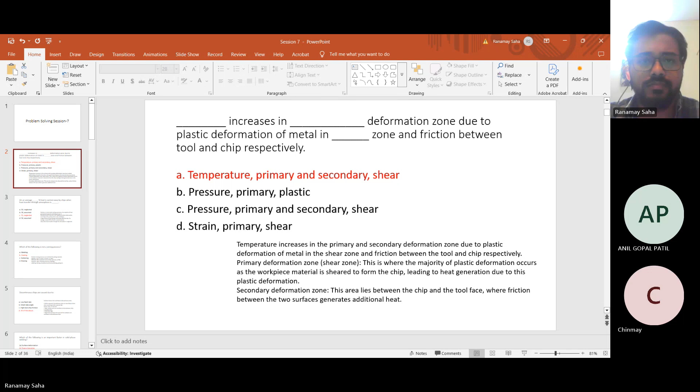The next question asks, on average, how much percentage of heat is carried away by chips when heat transfer to the atmosphere is neglected? As we discussed earlier, the maximum heat generation happens in the primary shear zone.

On average, 70% of heat is carried away by chips when heat transfer through the atmosphere is neglected, not assumed. In most metal cutting operations, the majority of heat generated during machining is absorbed by the chip due to significant plastic deformation in the primary shear zone, leading to a large portion of heat being carried away by the chip. So 70% of heat is carried away by chips when heat transfer to the atmosphere is neglected. I hope you answered this question well.

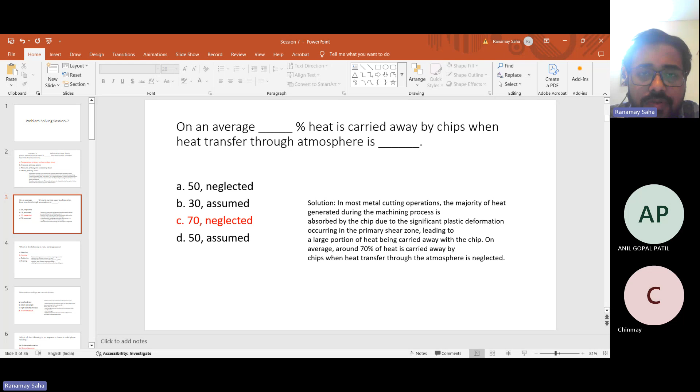The next question was simple: which is not a joining process? You can straight away know that except coating, all these processes are joining processes: welding, soldering, and brazing.

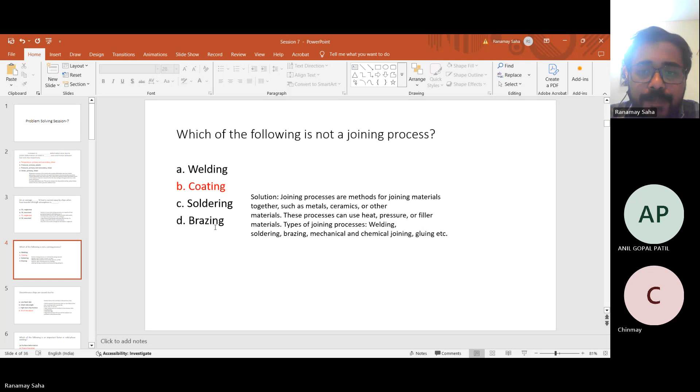The next question was about discontinuous chip formation. The factors that contribute to discontinuous chips include whether the material is brittle or ductile. Brittle materials, discontinuous chips are most likely to form when machining brittle materials such as bronze, brass, or cast iron. High cutting speed can lead to formation of discontinuous chips, and low feed rates can also lead to discontinuous chips.

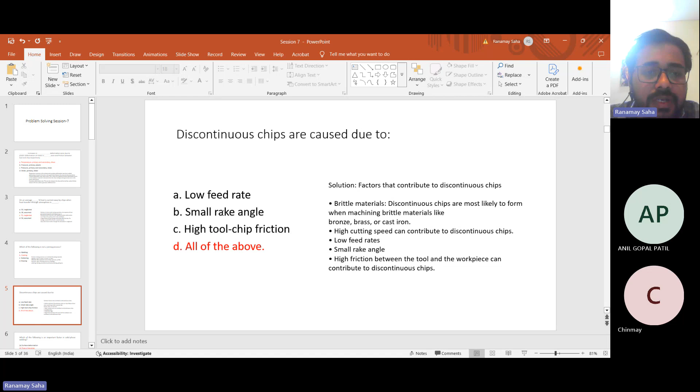A small rake angle means there is more friction between the tool and the workpiece, so in those cases also discontinuous chips can form. High friction between tool and workpiece is related to small rake angles. So in this option, all three options are correct, making option D the answer to the question.

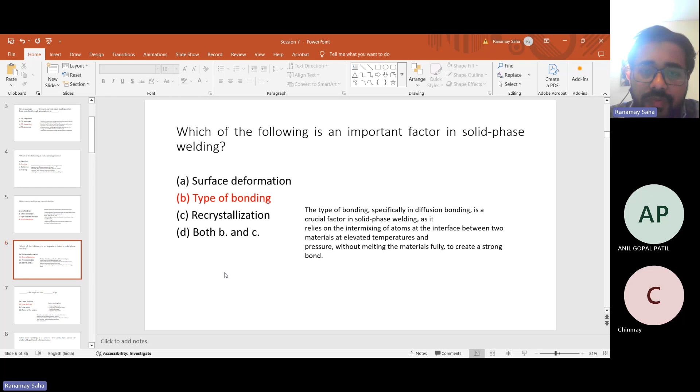The question asks which factor is important in solid phase welding. There are different factors to consider - some during machining, some during welding, and some pre-welding factors. The type of bonding, specifically in diffusion bonding, is crucial, as it relies on intermixing of atoms at the interface between two materials at elevated temperature and pressure without fully melting the materials, creating a strong bond. Since solid state welding doesn't reach the melting point, the bonding type needs to be considered well before the welding process is done.

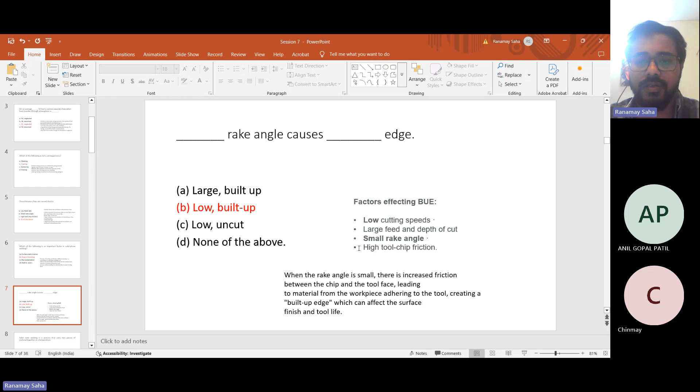The next question was about the relation between rake angle and built-up edge. Built-up edge formation is affected by low cutting speeds, large feed, and depth of cut, and is well affected by small rake angles. Small rake angles mean more contact between tool and workpiece, and more heat generation due to friction - equally meaning high tool-chip friction. So a low rake angle can actually cause built-up edge.

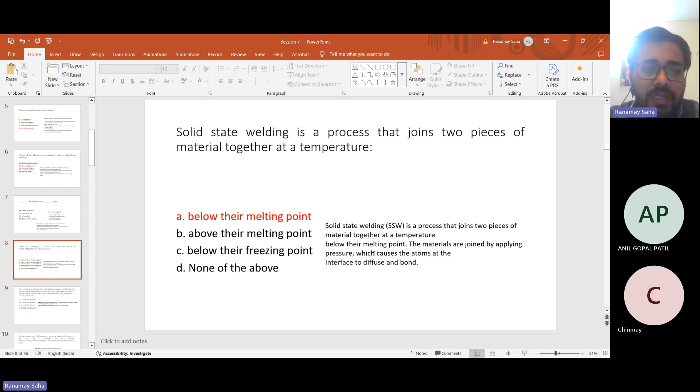The next question was about the solid-state welding process and the melting point. Solid-state welding joins two pieces of material together at a temperature below their melting point. Generally, we reach the recrystallization temperature, and at that point recrystallization happens with reformation of the grain structure, which defines the joint after welding. The materials are joined by applying pressure, which causes the atoms at the interface to diffuse and bond. So option A here is the correct option.

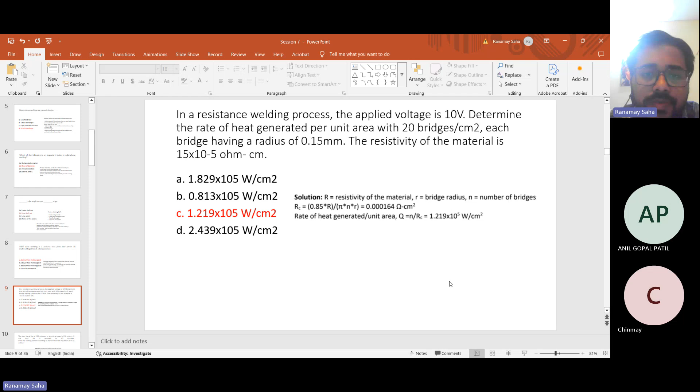The next question is a numerical - we've seen extensive numericals of this kind in earlier class. In a resistance welding process, the applied voltage is 10 volts. You have to determine the rate of heat generated per unit area with 20 bridges per centimeter squared, each bridge having a radius of 0.15 millimeters, and the resistivity given. Using R for resistivity, small r for bridge radius, and n for number of bridges, the heat generated per unit area is given by N divided by RC. RC can be determined using the relation between resistivity, bridge radius, and N: 0.85 R divided by pi r n. Plugging in values gives RC as 0.000164 ohm centimeter squared, and the rate of heat generated becomes 1.219 x 10^5 watts per centimeter squared. It's an easy formula-based question.

This was followed by a question on tool life, using Taylor's tool life equation. We've done much more extended equations based on tool life, so this type should have been easy. Here, tool life of 180 minutes is given at a cutting speed of 18 meters per minute, and the tool life is reduced to 45 minutes - find the new cutting speed according to Taylor's tool life equation, when exponent n is 0.5. You just equate the Taylor's tool life equation, Vt^n equals constant, in both situations: first with speed 18 meters per minute and time 180 minutes, second with new tool life 45 minutes, solving for speed with n=0.5. Plugging in the values, the velocity in the second case comes out to 72 meters per minute.

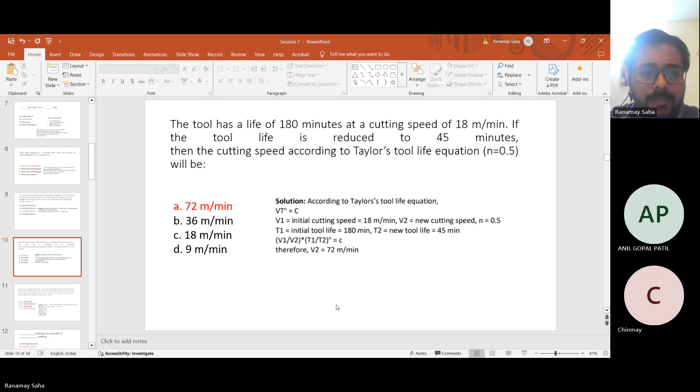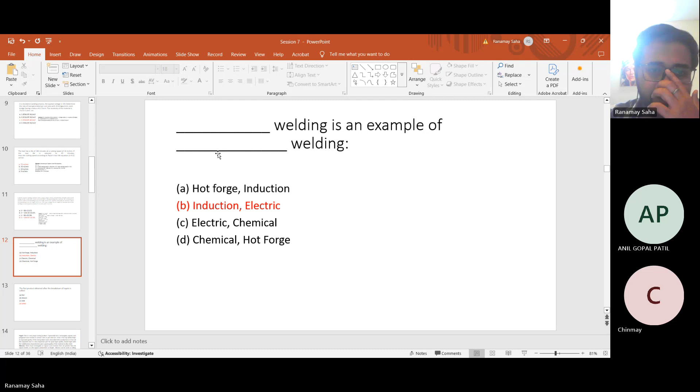What actually is an ingot? An ingot is a very large casting product, generally having a rectangular, square, or polygonal cross section in various sizes as per end use, meaning the desired application. It has a hot top which helps improve the quality of the end product and is discarded after production as it has all kinds of impurities. Despite this, it is a very important part for good ingot quality - sound ingots with good solidification characteristics give good quality material in alloy steel.

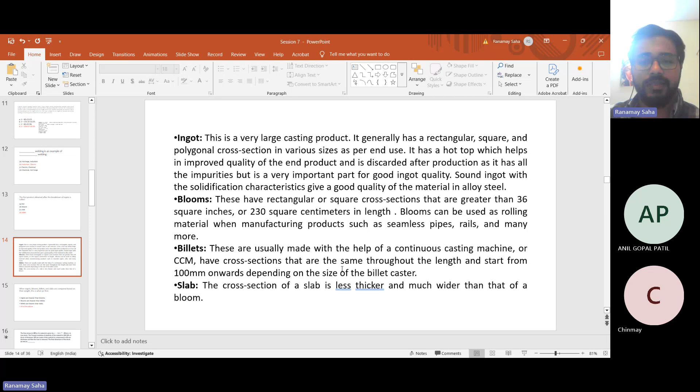Again, what are billets? Billets are those parts which are having uniform cross sections throughout the length, and these are made with the help of a continuous casting machine. So now I think you can relate the answer to this question: the first product obtained after breakdown of ingots is called billet, right?

So one more question on this discussion is: when ingots, blooms, billets, and slabs are compared based on their weight, what do you find? If you look at the first question, we have ingots are heavier than blooms, and blooms are heavier than billets.

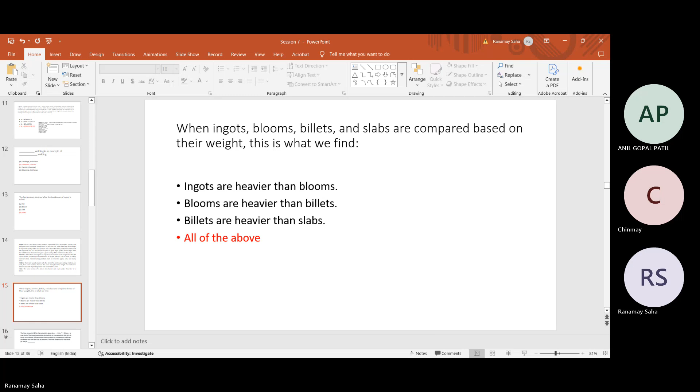Just a second. Yeah, so ingots are heavier than blooms.

Of course, ingots are the first, largest casting product, so these are heavier than blooms. Blooms are derived from ingots, so blooms are the next heavier part, and then billets are again derived from blooms. So blooms are heavier than billets, and billets are heavier than slabs, because in slabs the thickness is almost half of that of its width.

So all three options are correct. We have 'all of the above' as the answer to this question. I hope that's clear to you. If you have any doubt, you can please ask.

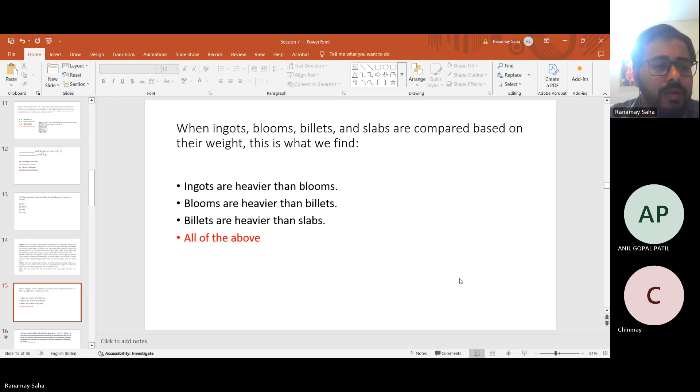All right, proceeding ahead, let's look into one question. Here the question relates to finding the final dimension of a block. If you've looked into the initial lectures of the current week, you might already be aware of true stress, true strain, engineering stress, engineering strain concepts, how a material yields, and the different theories that govern material yielding, such as von Mises and Tresca theory. You must also be aware of distortion energy theories, and the questions in these few slides are about those concepts only.

In the current question, the flow stress of the material is given as sigma equals 500 epsilon to the power 0.1. Here 0.1 is the strain hardening exponent, epsilon is the true strain, and 500 is the yield strength, or you can say it is the strength coefficient.

Now the Young's modulus of elasticity of the material is given as 200 gigapascals, and a block of thickness 100 millimeters made of this material is compressed to 95 millimeters thickness. So the final dimension is 95 mm and the initial thickness is 100 mm. After that the load is removed, and the final dimension of the block needs to be found out.

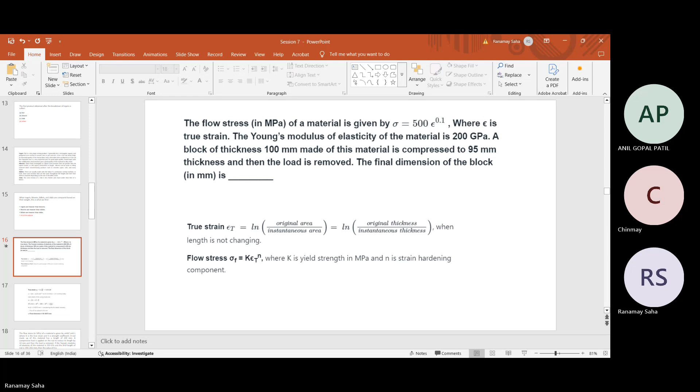All right, so I think you might have tried at least to solve this problem. Then let us see the solution. The question says we have to find out the final dimension when the stress strain relationship is given to you. Now here, the true strain — we have discussed how to find out the true strain.

It is natural log of original upon instantaneous area, okay, or you can say final area, or in other words, if the length is not changing, original thickness upon final thickness. In this case, the thickness changed from 100 millimeters initial to 95 millimeters final. So using that relationship, you can find out the true strain value.

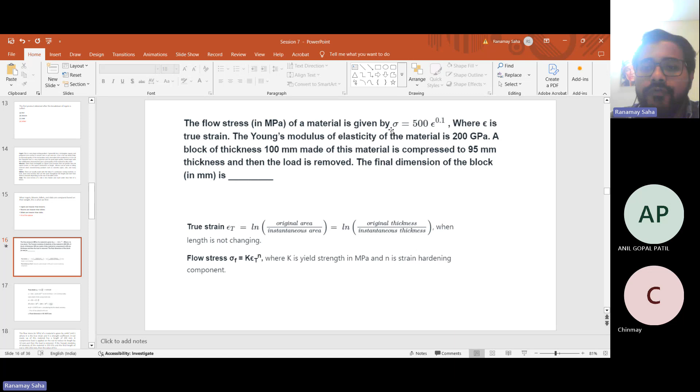Now just plug in the true strain value into the stress strain relationship provided in the question. n has been provided as 0.1, the strain hardening exponent. So you get the sigma value as almost equal to 371.5 megapascals.

Now up to elastic limits, Hooke's law holds true. So if sigma is E epsilon, E is the Young's modulus and epsilon is the true strain. We can simply replace epsilon as change in length to original length. Original length is 100 here, and change in length be delta L. You plug in the sigma value found using the stress strain relationship, and then plug in the Young's modulus, which is provided to be 200 gigapascals.

Once you create this, the only variable remaining is the change in length delta L. You can find delta L as 0.18575 millimeters, and then that can be added to the final dimension to actually find the final dimension.

Sir? Yeah, please tell me, hello. Yeah, please go on. Sir, I had two doubts, sir. Yeah. Sir, first one was that...

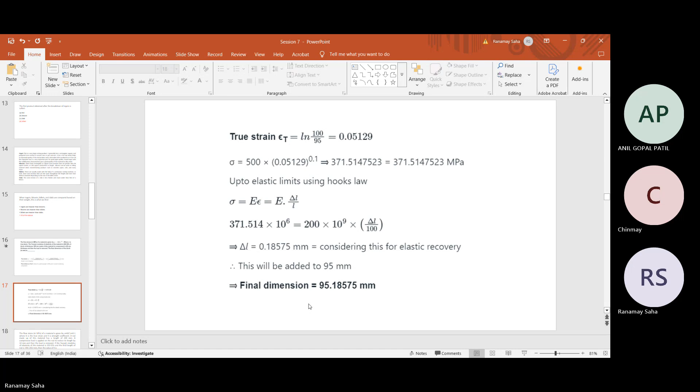The true strain value might not be equal to the engineering strain value. So in the Young's modulus, you actually use that the true strain may not hold true. So that's the point. Okay, sir. So okay, then.

The problem is similar to the earlier question, only little tweaks may be required. So give it a try, and then you will see the solution.

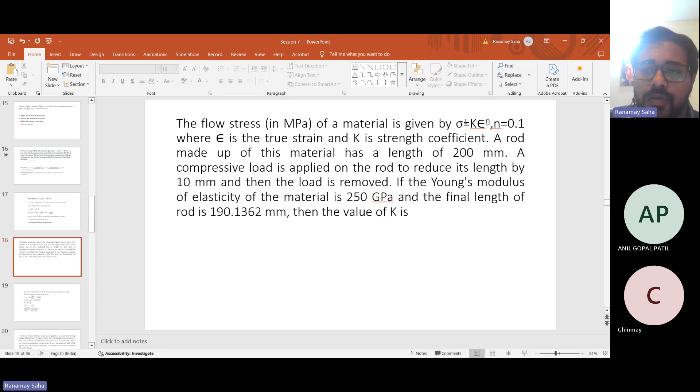So very simple, the rod is compressed by 10 mm by applying a compressive load. The true strain is given by, because this is in transverse direction, ln of 190, the final length upon the initial length of 200, which is minus 0.0513. Then the stress strain relationship is sigma naught equals k epsilon power n, and epsilon we just found to be 0.0513, with exponent 0.1.

Again, for the elastic case, we know strain can be related by Hooke's law as sigma by E. So just compare these two formulations. Delta L by L can also give you the strain value, and for the elastic case, using Hooke's law, sigma by E can also give the strain value. So the only unknown value remaining is K, the strength coefficient. Then if we compare both LHS and RHS sides, we can find the value of K.

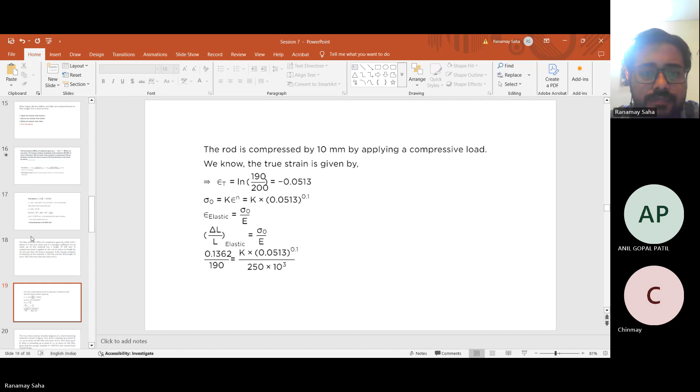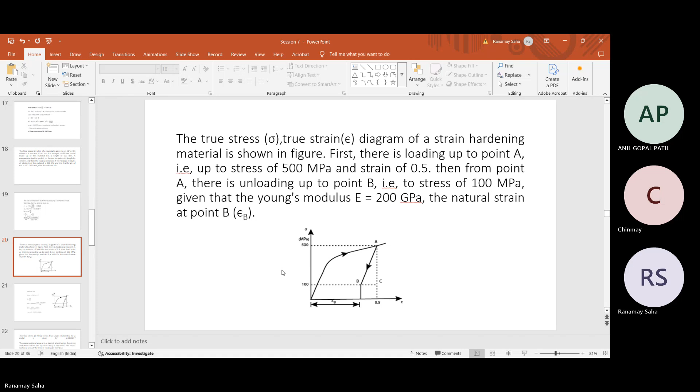Sir, for the last question, answer? Can you see the answer on the screen? Yeah sir, sorry.

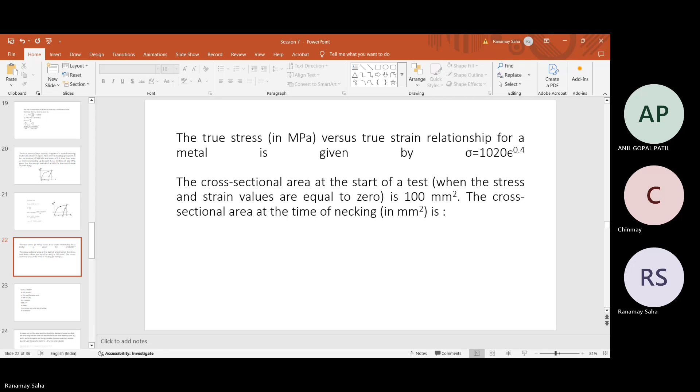So we discussed about the necking process, where the ultimate tensile strength is reached. Now, how do you find what happens at the necking point? You might know that the true strain becomes equal to the strain hardening exponent n. So how do you find that?

You have to find the maximum stress, which you can find by differentiating that with true strain and equating it to zero. When you do that, you'll find the true strain value coming out equal to n at the necking point, which is the mathematical model of finding the maximized magnitude.

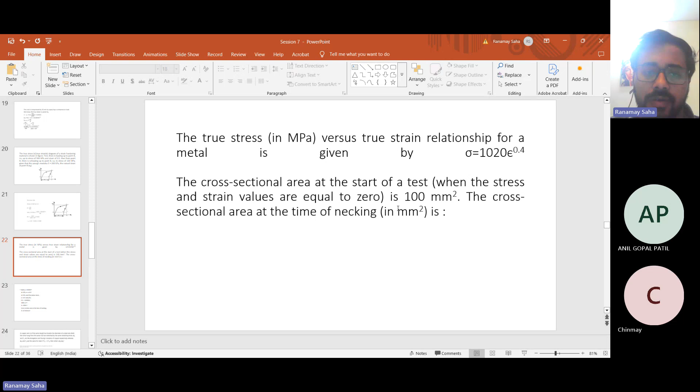So at ultimate tensile strength, the neck formation starts. The epsilon t, you can equate to the n value of 0.4, which is again the ln of initial to final area. From that you can find the final area to be 67.032 millimeters squared, so you can see how much it reduces from 100 to 67, beyond which the material starts to fail.

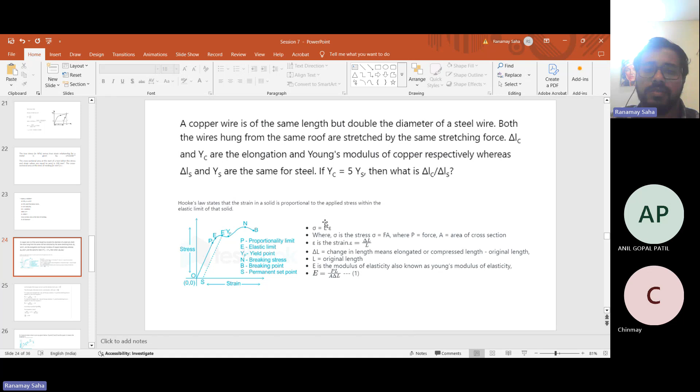Now you can put in these values to find the Y value. You've seen how to find Young's modulus here, as PL by A times delta L. From that you can find the Young's modulus for both wires, using the stretching force P, which remains constant in both cases.

Now, comparing with what's given, that Y_C equals 5 times Y_S, you can easily find the elongation ratio of copper to steel wires, which comes out to be 0.05.

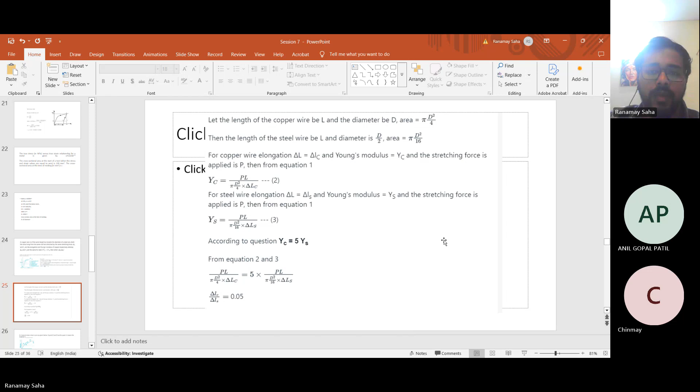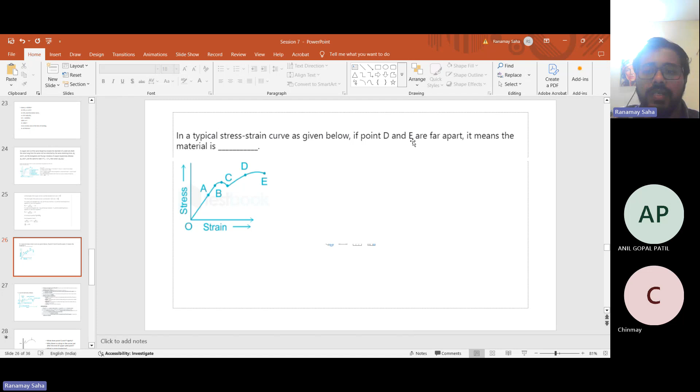If this is clear to you, then we will look at one more conceptual question. It says in the typical stress-strain curve, the points D and E are far apart. So what does that mean?

Now we have an idea of the stress-strain curve and how the material behaves, so you know all these points: the ultimate stress point, the breaking point, the fracture point. It says that the ultimate stress point D and the fracture point E are far apart. Then what is the material? It's a ductile material, because then you have a longer area in which the material is getting plastically deformed before reaching the ultimate point.

So the material has higher capability of holding load and stretching, so it is more ductile in nature. You know all these options and definitions: ductile, brittle, malleable, and lustrous.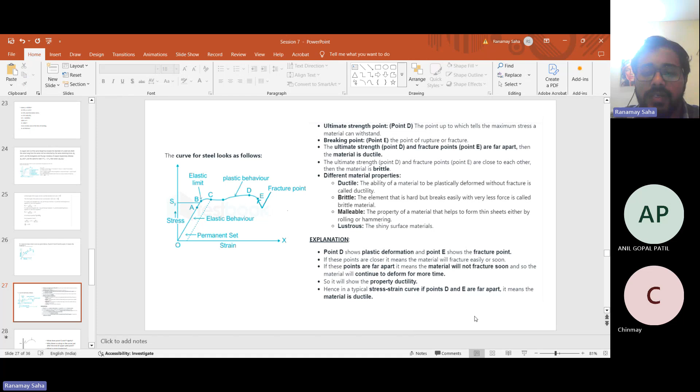Point D shows plastic deformation, and point E shows fracture point. If these points are closer, it means the material will fracture easily or soon, since the plastic deformation region is smaller. But if these points are far apart, the material will not fracture soon and will continue to deform for more time, showing the property of ductility. So in a typical stress strain curve, if points D and E are far apart, it means the material is ductile, right?

In earlier classes we discussed the dislocation factor and how many types of dislocations a material can encounter. When these dislocations start flowing, the stress magnitude suddenly drops, and that becomes the reason for the sudden dip in the stress strain curve.

Then it starts to rise again, because of strain hardening. By now you all know what strain hardening means. The piling up of defects gradually hardens or strengthens the material, because the flow of defects is hindered by piling up one over the other. Then the material strengthens, and its capability to hold more load increases, so the stress value slowly increases with respect to the strain. That is why there is a rise, and that is called the strain hardening effect.

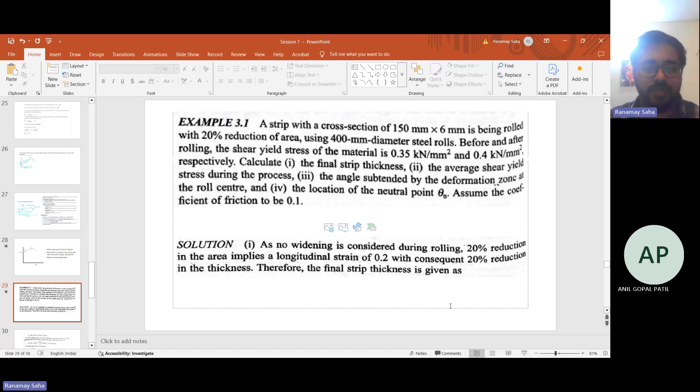Let us quickly look at the solution. We already said the thickness is 80% because a 20% reduction was mentioned, so it becomes 4.8 millimeters. For this question you have to first understand the derivation, which I am not going to show now—it will be taught in your regular classes. Now let's look at the problem: you have been given the yield stress of the material before and after rolling. The average yield stress becomes half the sum of these two, so it becomes 0.375 kilonewtons per square millimeter.

Then, the angle subtended at the roll center is the difference in thickness upon the roll radius r, and the square root of that gives 0.0775 radians. The next point is to find the location of the neutral point N.

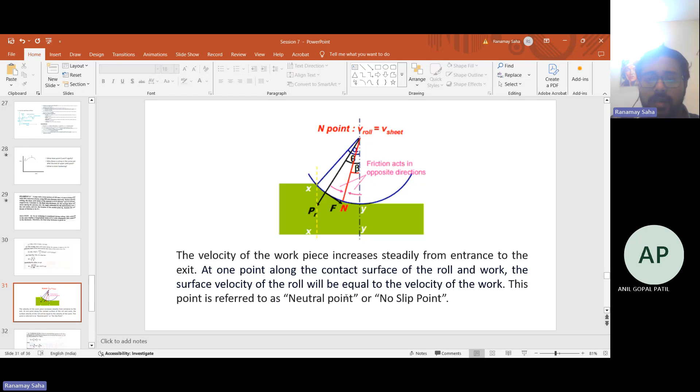That is the neutral point, when no slip is there and the velocity becomes equal. Now you have to determine the location of the neutral point, that is theta n.

For that, lambda n is a dimensionless constant to be found out. You can find it using this equation, which asks you to find lambda I value, and that comes from another equation which depends upon theta value. So theta we have found out earlier, the angle subtended at the center.

Using that, you can find lambda I, and put it back to find lambda n. Once you find lambda n, you can use this equation to find the value of theta n. So lambda I value comes out to 5.99.

You can practice and check if these are right back home. Lambda n becomes 1.88. So theta n can be expressed using this equation, and simply you can find the theta n value to be 0.023 radians.

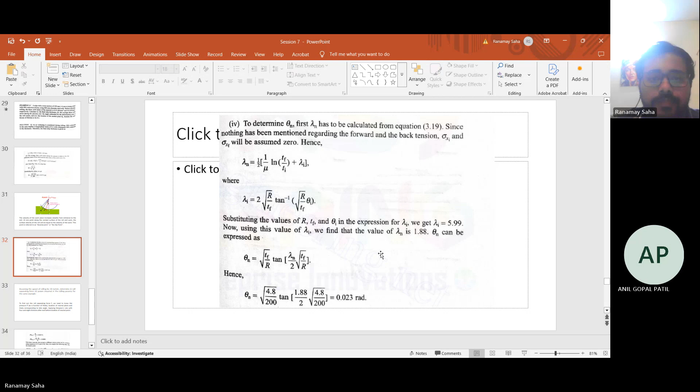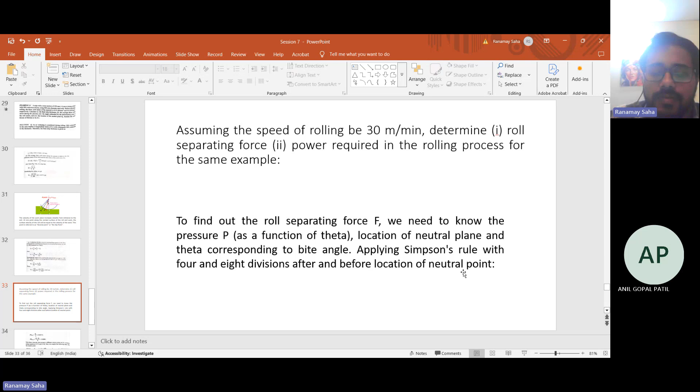So as a continuation to this problem, we are trying to find out the roll separating force F. For that we use the integration rule - you must be aware of Simpson's rule for 4 and 8 divisions, after and before the location of the neutral point. This is the procedure which is followed.

You can find the theta value after the neutral point by dividing that by 4, coming out to 0.00575, the magnitude of each division. Then before the neutral point, following the same process, the magnitude of one division is 0.00681.

Using these values, you can find 5 values for the after theta data, and subsequently for the before data. From theta, you can find the y value if you know the rolling process - the thickness of the sheet is given by y. Using that y value, you can find the lambda, and hence the stress and the roll force value for that particular point.

Since we have a certain number of divisions, we get a certain number of p values, and then we can use Simpson's rule. You can revisit the Simpson's concept, where r is the roll radius here, r d theta is the area - r is the radius and theta is the angle subtended.

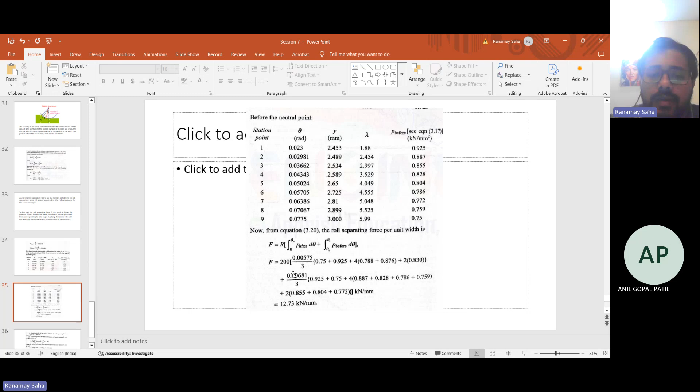For the after part and the before part, you can separately integrate, and using Simpson's rule with the numerical integration technique, find the total roll force - 12.73 kilonewton per mm. Again, for two rolls you multiply that, and for the total width of the strip, 150 mm, you find it to be 1909 kilonewtons.

The driving torque is simply r square mu d theta. R d theta is your area, and mu r is your force, so that gives the total torque value multiplied with force value.

For the before and after rolling process, you again find the division subtraction to get the total torque to be around 100 kilonewtons per unit width. Multiplying with the total width of the strip, the total torque becomes almost equal to 15 kilonewton meter.

Now, the total power is found by multiplying the angular velocity of the rolls, omega, which is in radians per second, giving total power in kilowatts. Omega, the RPM, is given in the question, and from that omega comes to 2.5 radians per second. The total power, twice for two rolls, becomes 95.6 kilowatts.